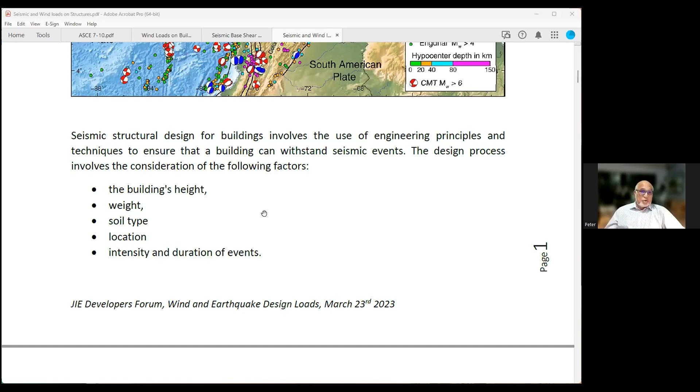The design process involves the consideration of the following factors: the building's height, weight, soil type, its location locally, and in a more sort of larger geographic location basis, the intensity and duration of events.

Well, one of the primary considerations in seismic structural design is the building's foundation. This must be able to withstand the resulting forces generated by seismic events in order to distribute these forces proportionately throughout the structure. Typically, deep foundations such as piles, caissons, and rafts are used for tall buildings, as these can provide greater stability and resistance to lateral and overturning forces.

What this really means is that the soil is your host. You're placing the building in the ground, and from the ground comes the ground motion in an earthquake. If the building substantially disconnects from the soil through shear, it no longer performs in its overturning duties. So the business of deep foundations is, one, to get to harder ground, but two, to contain yourself within the ground so that you do not slide along and emerge at the surface and thereby lose your bearing capacities. So that's a quick aside there.

Another important consideration is the building's lateral load resisting system. This system is designed to resist and survive the horizontal forces and displacements generated by seismic events and prevent the building from collapsing or suffering major damage. Different types of lateral load resisting systems can be used, including moment resisting frames, which we are all pretty well accustomed to: beams, columns, slabs, shear walls, brace frames, and combinations of these. As you will see, we generally have frames and shear walls in a common combination. But let me not pause there, depending on the specific requirements of the purposes and architectural intent.

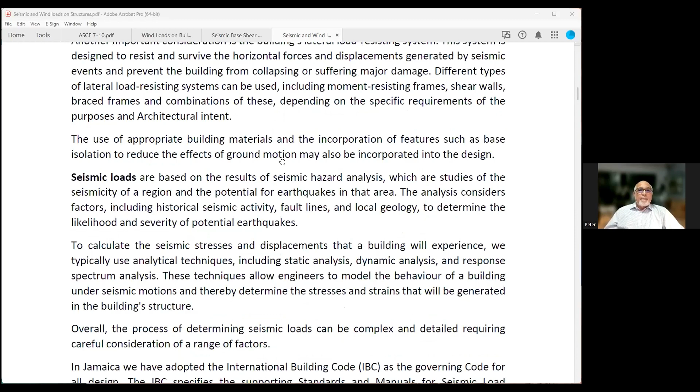Seismic loads are based on the result of seismic hazard analysis, which are studies of the seismicity of a region and the potential for earthquakes in that area. The analysis considers factors including historical seismic activity, fault lines, and local geology, all to determine the likelihood and severity of potential earthquakes.

Moving from that base to calculate the seismic stresses and displacements that a building will experience, we typically use analytical techniques, including static analysis, dynamic analysis, and response spectrum analysis. These techniques allow engineers to model the behavior of a building under seismic motion and thereby determine the stresses and strains that will be generated in the building structure. Overall, the process of determining seismic loads can be complex and detailed, requiring careful consideration of a range of factors.

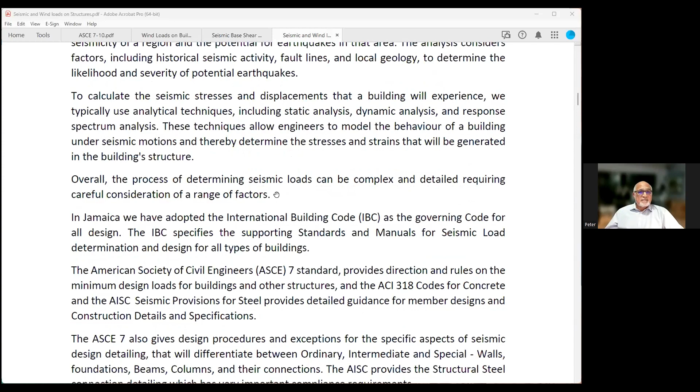The American Society of Civil Engineers, ASCE 7 standard, provides direction and rules on the minimum design loads for buildings and other structures, and the ACI for concrete and the AISC seismic for steel provides the member design and construction detailing and specifications. So it's not all very loosely referred to in the mother document, the IBC, which really presides on every aspect of building design.

The ASCE 7 also gives design procedures and exceptions for the specific aspects of seismic design detailing that will differentiate between ordinary, intermediate, and special framework and walls and everything. These are three tiers of detailing and design requirements to qualify a building for a particular type of lateral load resisting system. As I go on, I will explain better on that.

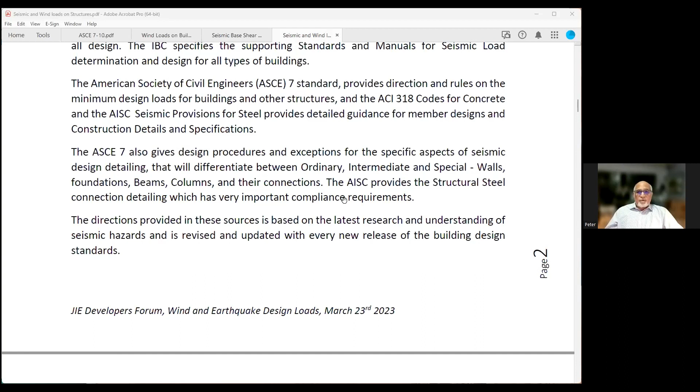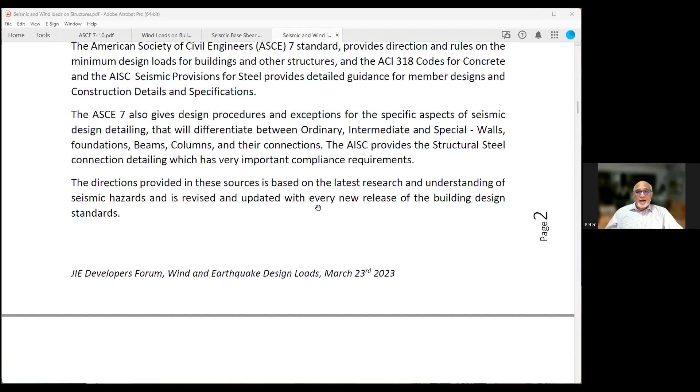The AISC provides structural connection detailing, which has very important compliance requirements. Steel has nearly been an art for seismic detailing, because every time they thought they had it covered, a little shake would go and reveal weaknesses. So in my view, it continues to be an emerging art, steel detailing. I'll come back on that too.

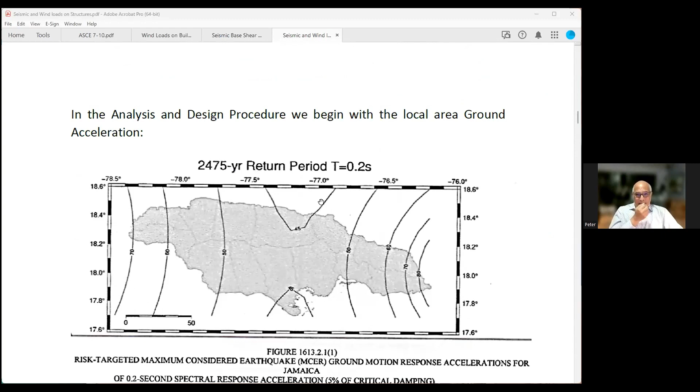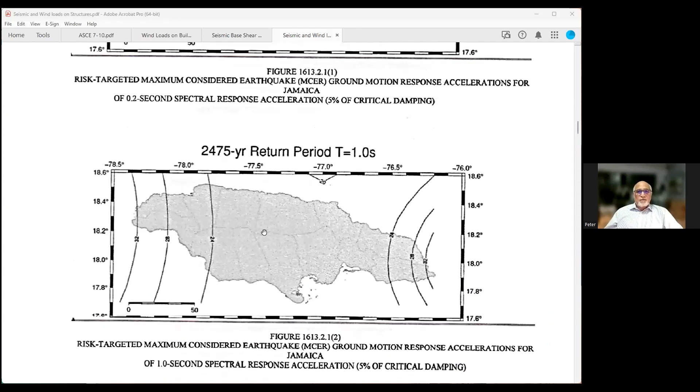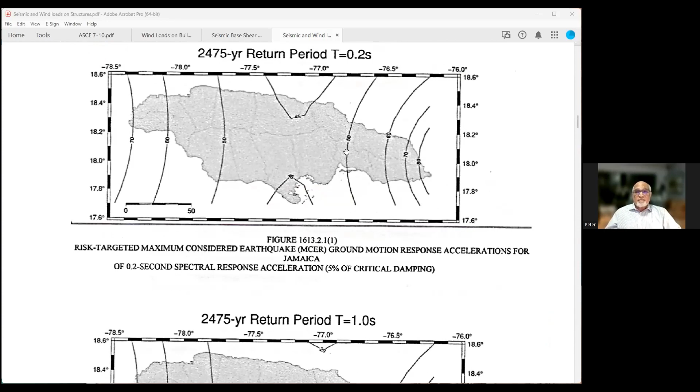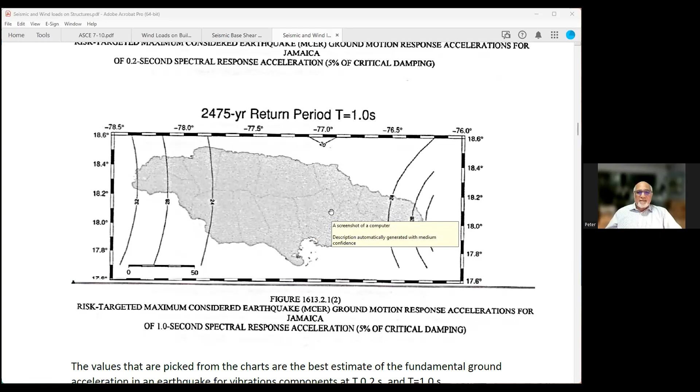Our 0.2 second frequency acceleration as a starting point would be about 0.5, or 50%. Similarly, for the 1 second period, acceleration embodied at that frequency, we are, well, the most of the center of the island is at 0.24. So these are what have been presented to me as the most recent national bases for seismic starting point design.

Okay, the values that are picked from the charts are the best estimate of the fundamental ground acceleration in an earthquake for vibration components of 0.2 and 1. These frequencies have been determined to represent the coordinate values for the full spectrum of frequencies in the average earthquake. So these two values we extract from this chart would help to develop this spectrum. Now this spectrum, let me read what I have prepared.

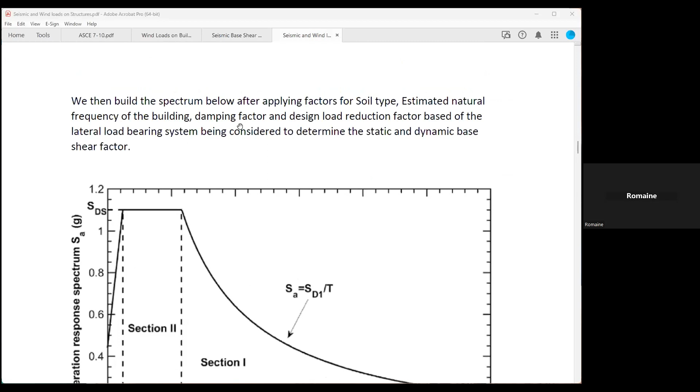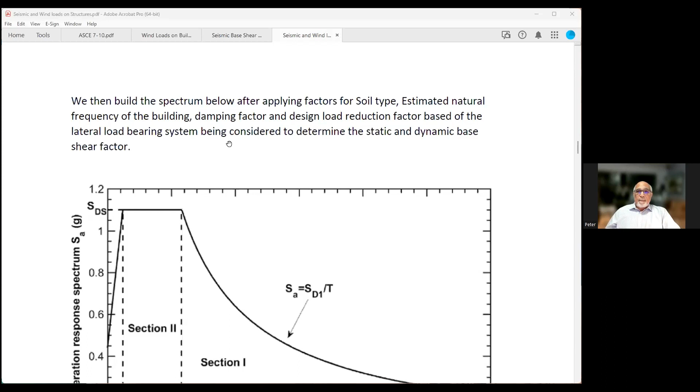We then build the spectrum below after applying factors for soil type, estimated natural frequency of the building, and damping factors, and design load reduction factors based on the lateral load bearing system being considered, to determine the static and dynamic base shear factors. Earthquakes arrive at a building as ground lateral and vertical accelerations, imparted to the building through the ground only.

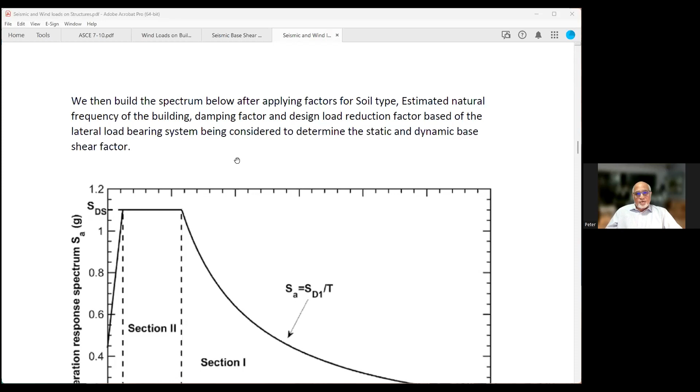So it is our starting point for determining the effective design earthquake loading on a building. The spectrum shows a relationship between the frequencies of ground motion and the forces imparted at these particular frequencies.

Let's quickly look. At point 2, we would have put in what we got from the chart at 0.5, as the acceleration, 0.5g. And we would have put in what we got from the chart here at 1, but a lower value than this - this is a generic chart. Those two points we get from up here, I call them the coordinates of our spectrum, or general building response - the whole spectrum of accelerations at frequencies.

You have to understand that an earthquake doesn't come as a pure clean sine wave. It comes as a whole bunched cluster of sine wave frequencies, carried by frequencies from very high resonance level frequencies to very low, tedious, slow ground motion. There are components of all these frequency movements in an earthquake, and they generally are highest within the 0.2 to 0.6 zone, according to this chart.

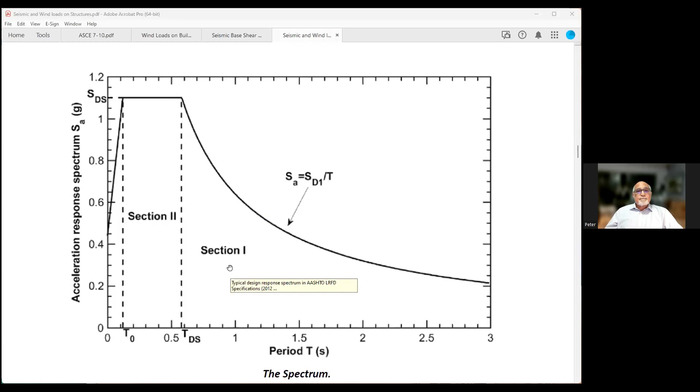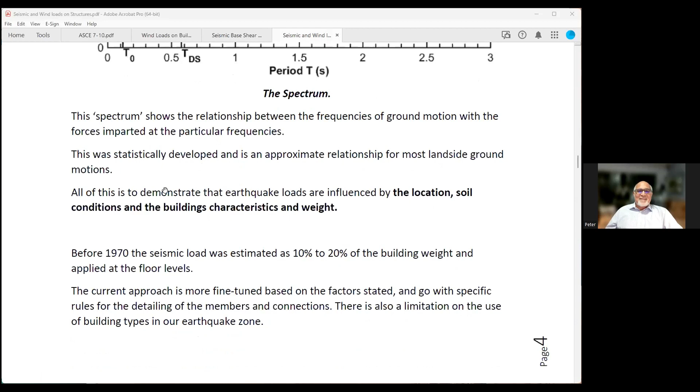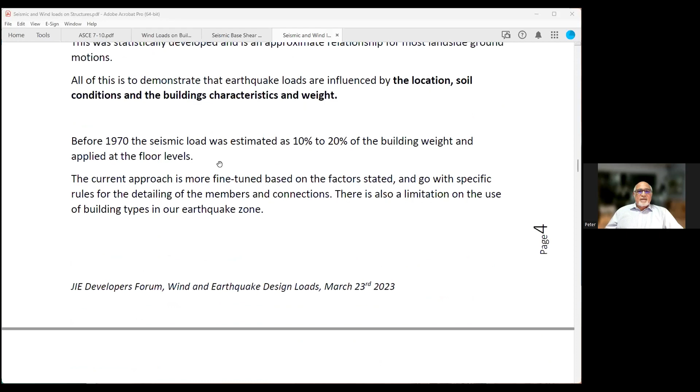This chart is not really populated for any particular job. All of this is to demonstrate that earthquake loads are influenced by the location, soil conditions, and the building characteristics and weights. Let me continue a bit because I think I'm not giving you supporting evidence for what I'm saying.

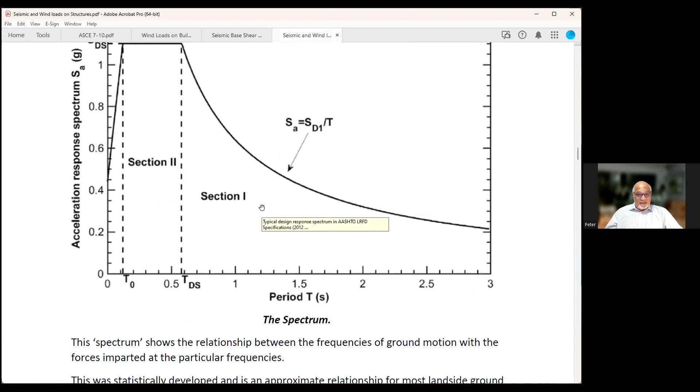There is a context called the soil type, ranging from type A to type F - ranging from very solid rock to soft soil. Type B is the basis for factors of 1 in terms of its influence on this SDS determination.

So for soil type, our common soil in Kingston is type D, and maybe downtown getting closer to E as you have more fines and clays mixed in. Type F, I would put in Black River, anything floating on peat. All of those tend to increase - let's just refer to SDS for the time being - increases your peak acceleration.

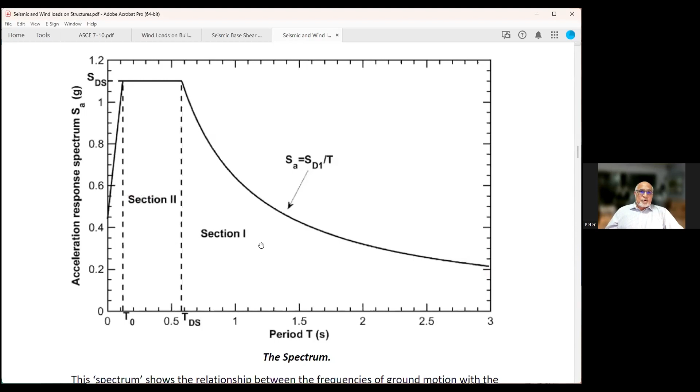D adds about a factor of 1.5 to 1.8 to the starting value. A and B would be 1 to 1, no change. And then F would be up by 2.4. So those are the factors you apply to get ultimately your SDS, which takes you directly after incorporating your building natural frequencies.

Let me just explain that every building has a frequency. Every building, if you pluck a building, it will bounce back, and that is natural frequency in the simplest of terms. When the earthquake frequencies coincide with the natural frequency of the building, that is generally the value that has the highest force participation.

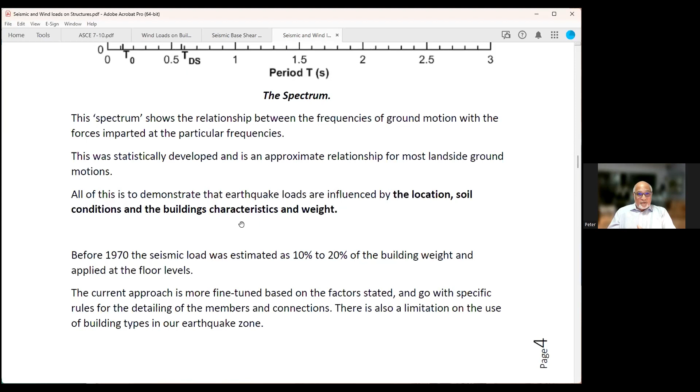I'm running ahead to mode shapes. Mode shapes are the sort of resonant and otherwise response of buildings, so you have mode shape participation - it's not just a single sway that has all the load. You have different types of sway that have components of the imparted earthquake accelerations on the building.

One moment, please. Pause. Sorry about that, just a distraction. So I hope I'll pick up where I should pick up.

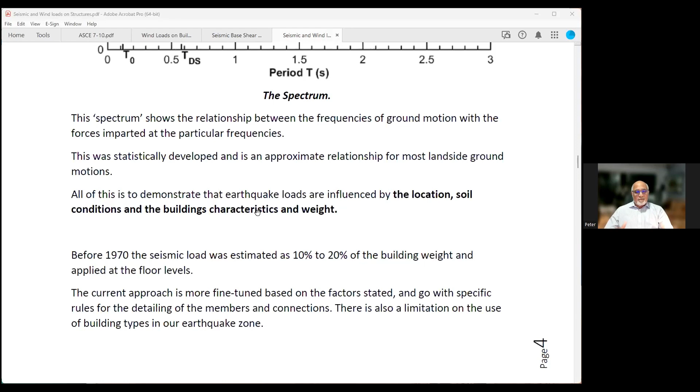I think I've sort of introduced you to spectrums and their delivery of seismic responses. This is really very important when we do dynamic analysis - I will show a little more on that after. So building types totally influence the seismic load you consider in your design.

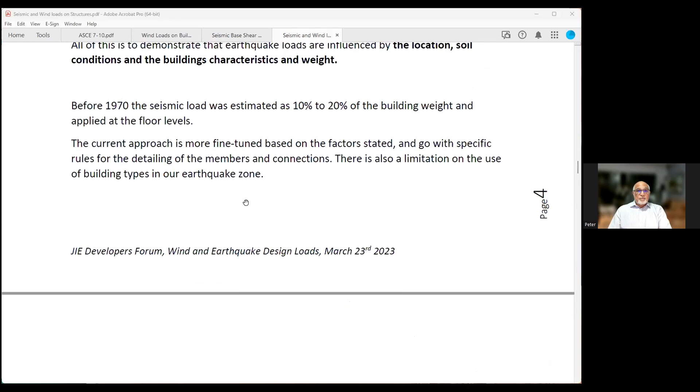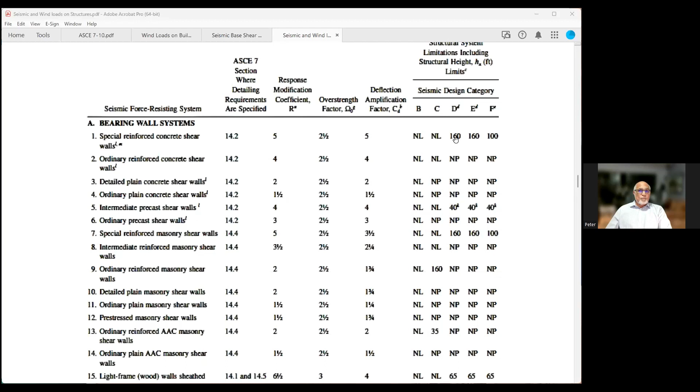Let me just quickly show you some building types for lateral load resistance. A common use is special reinforced concrete shear walls, because if you go to D - all Jamaican buildings are obliged to be in design category D, because we're borderline C in very low instances, but we're pretty well squared in D. So we have to abide by the comments in this column. We're allowed up to 160 feet high for a special reinforced shear wall building.

We're not permitted to have ordinary reinforced concrete shear walls doing the seismic duties. Neither are detailed plain concrete or ordinary plain concrete. With intermediate precast shear walls - which one could consider the old Gore homes as being intermediate precast shear walls - you're allowed to 40 feet. Ordinary precast shear walls are not permitted.

Special reinforced masonry shear walls. Special reinforced masonry really doesn't kick in until we go 8 inches or above for our blockwork, our CMU. And the encasing stiffeners and belts, to use our common descriptions, have to be substantial and detailed according to the highest standard of rebar detailing.

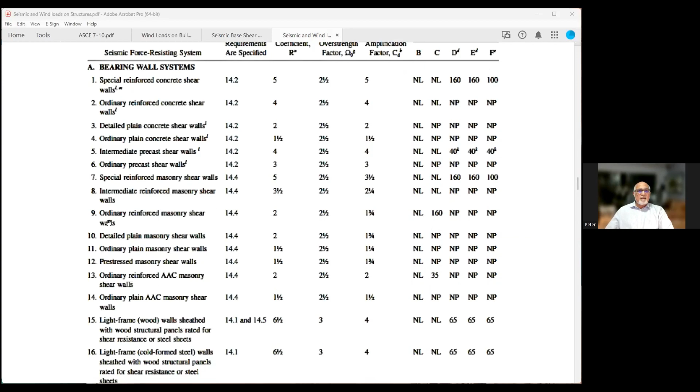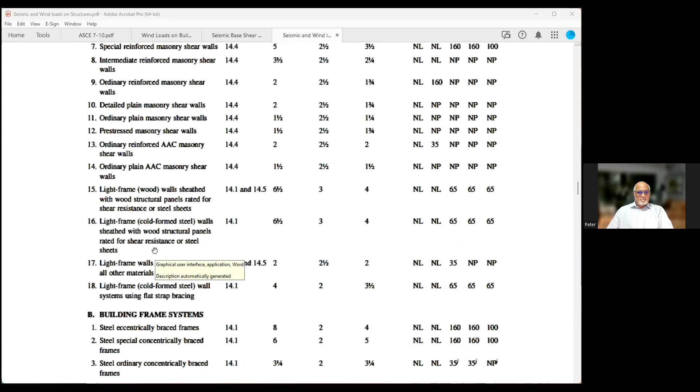Continuing through, what you will see here is that not many plain masonry, ordinary plain masonry, pre-stressed, not many other building types are countenanced or allowed for D, unless you prove that your equivalent building essentially falls into one of the permitted classes. Because invariably you're going to have hybrids, mixes of building types because of just architectural needs. But the ASCE 7 sets down your borders for qualifying for these.

And you're rewarded if you're going to build a building according to the permitted, and you adhere to the special or the ordinary or the intermediate as it requires, you're rewarded with a high value for your response modification coefficient. This high value is good because when you get up to the SDS, you're then allowed to divide it by this response modification on the promise that you are going to detail the building according to these rules.

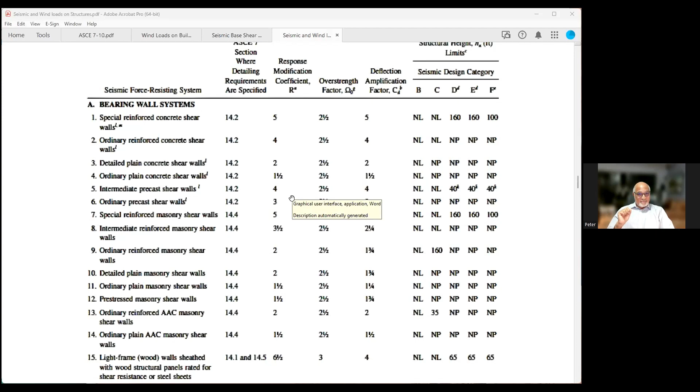If you're not, you're going to have, especially if you look at the non-permitted, very low response modification coefficients. Intermediate, you get a little bit there, but anything that is not permitted requires a higher design base shear. As we go down, you will see where lightweight, light frame structures with special detailing are permitted because they have no mass. So they're very low mass, so they wouldn't be inducing and creating loads.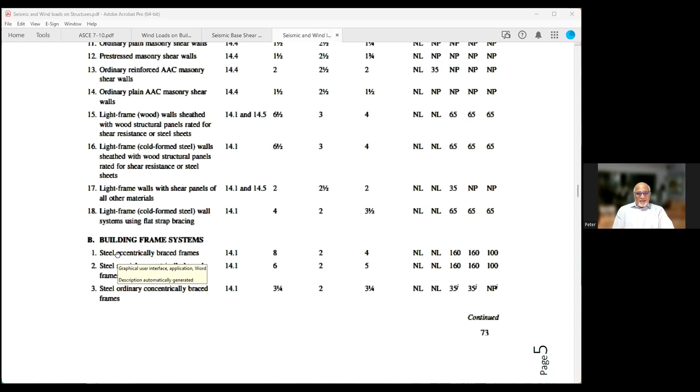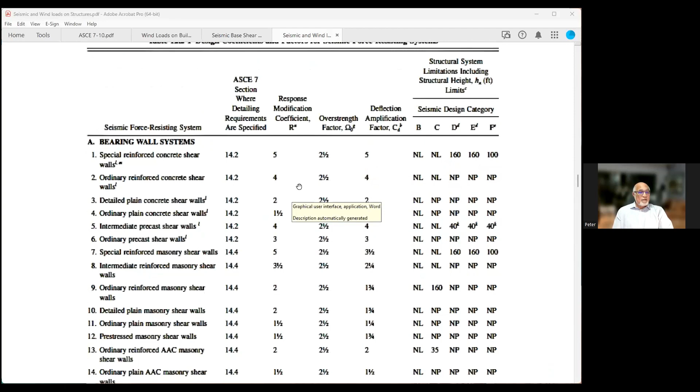Here we go now, building frame systems. A steel eccentrically braced frame is permitted because of their ingrained and natural level of ductility. A lot of all of these conditions and rules stem around detailing for ductility, which is the ability of the building to survive many, many reversals of displacement.

Ordinary to intermediate to special—those are just more intense detailing surrounding creating ductility in your beams, columns, shear walls, and all the connections. The connections are very, very strongly protected by these categories of building type. Let me just jump to where a lot of our high-rise buildings tend to get into the dual systems.

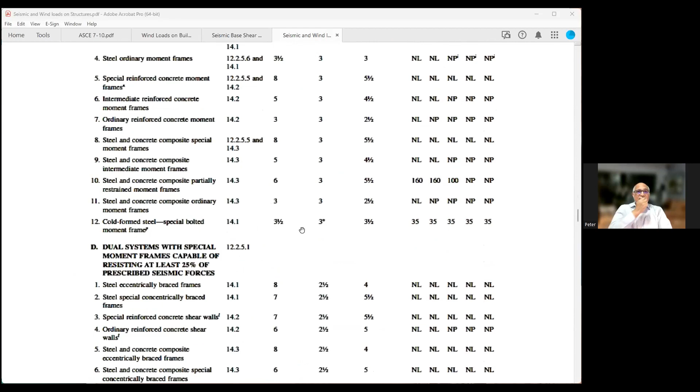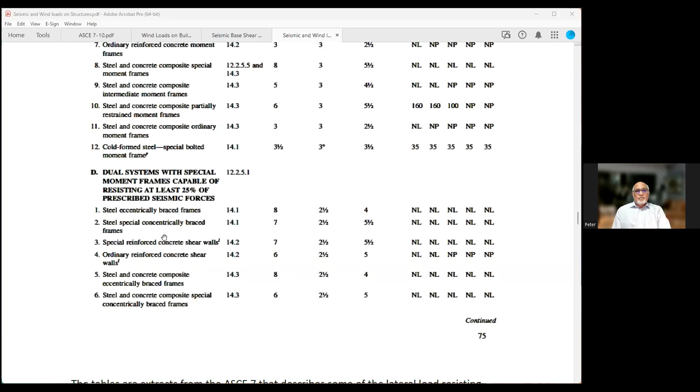In reinforced concrete, special reinforced concrete shear walls, ordinary reinforced concrete shear walls, you get very high reduction coefficients because they expect very high performance from special and intermediate detailing. It's a big difference between ordinary and special, and it's compulsory to enjoy using a lesser design load.

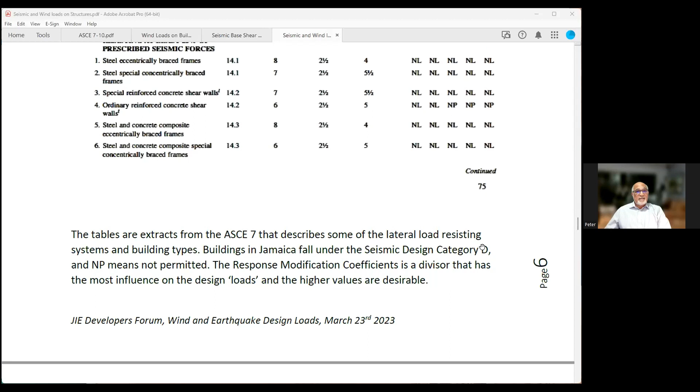So the tables are extracts from the ASCE 7 that describe some of the lateral load resisting systems and building types. Buildings in Jamaica fall under the seismic design category D, and NP means not permitted. The response modification coefficient is a divisor that has the most influence on the design loads, and the higher values are desirable. So in essence, the design loads are not a fixed proportion of the building weight.

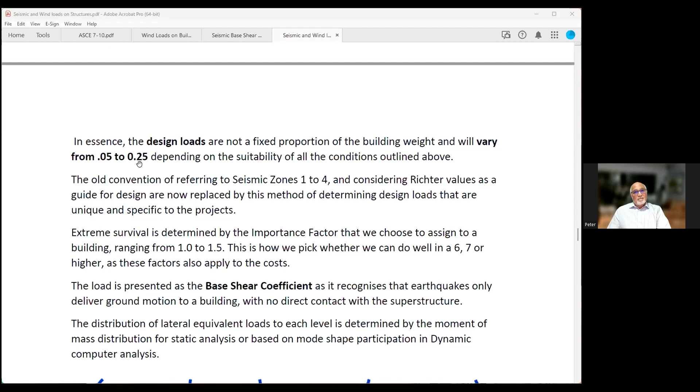Thinking of your base shear coefficient, it will vary from 0.05 to 0.25, depending on the class of building that you are undertaking. Old conventions of referencing to seismic zones 1, 2, 3, 4, and considering Richter values as a guide for design are now replaced by this method of determining design loads that are unique and specific to the projects.

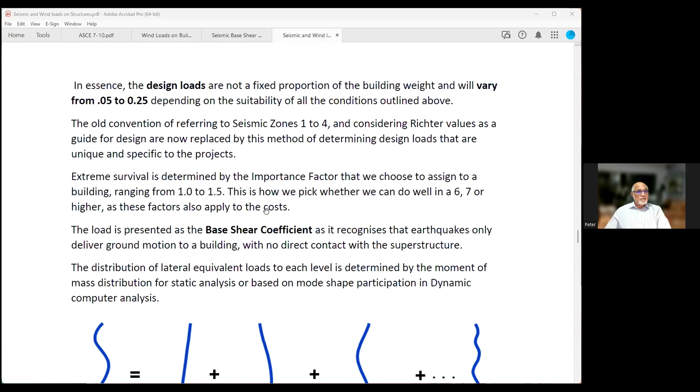Extreme survival. We sort of ask then, how do we treat with a 4 or a 6 or an 8? Extreme survival is determined by the importance factor that we choose to assign to a building. So this ranges from 1, or maybe 0.8 for an agricultural shed, 1.0 to 1.5. This is how we pick whether we can do well in a 6, 7, or higher, as these factors also apply to the costs. So saying that, we choose whether we want to make our apartment more important than it is.

To be sure that it survives, it's the last building standing, and we simply increase our design stresses and everything according to the importance factor. So that's how we treat with Richter values and trying to pinpoint what Richter value you want to survive.

On average, I think we sort of place everything coming out of a 6 with very little damage, 7 with damage, and I really don't know how to discuss above that. But that's all we can do for you. And these are the code-guided approaches and methods and the basis for determination.

All I can say is that if you document your designs to verify and prove that you have abided by the code, your building will do well if built properly, but you will have strong ground to stand on against emotional claims of bad engineering when the building shows some major defects after a 7.

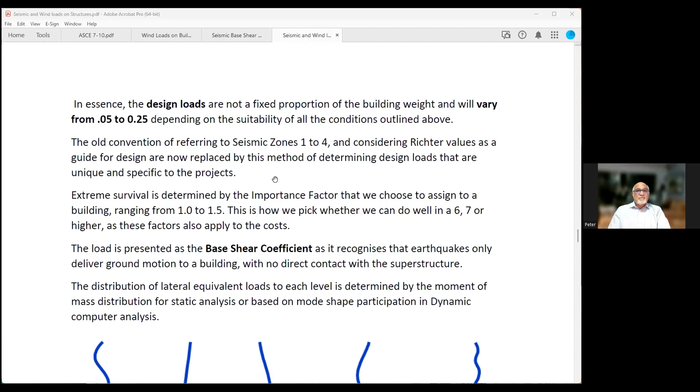This is your safety net, to stick to this implicitly and to not break any of the rules required of the building class, building moment resisting system that you have claimed. Chosen is one thing, claiming is seeing it in the ground as specified.

Okay, so now just to show, the load is presented. Seismic load is presented as the base shear coefficient, which is the outcome of your mode shape and other deductions. You have a base shear coefficient, which multiplied by the weight of the building gives you the gross static equivalent base shear. I say static equivalent because dynamic analysis goes beyond just static loads being applied.

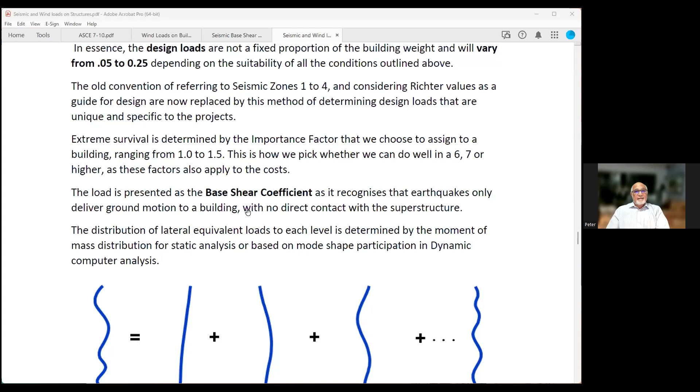Let me explain a little bit about dynamic analysis. The distribution of lateral equivalent loads to each level is determined by the moment of mass distribution for static analysis, or it's based on mode shape participation in dynamic analysis.

Proper dynamic analysis embraces the stiffness deterioration of a building. So it does many cycles of analysis, and with each cycle it reduces the moment of inertia, which is the easiest way to simulate a crack. You reduce the moment of inertia of all the members and do the analysis cycle again, reduce it. It might do four cycles, each with incremental reductions in your moments of inertia to simulate the deterioration of a building during the course of displacements. So that's a good thing about dynamic analysis - it accounts for redistribution of strength in a building as it decays.

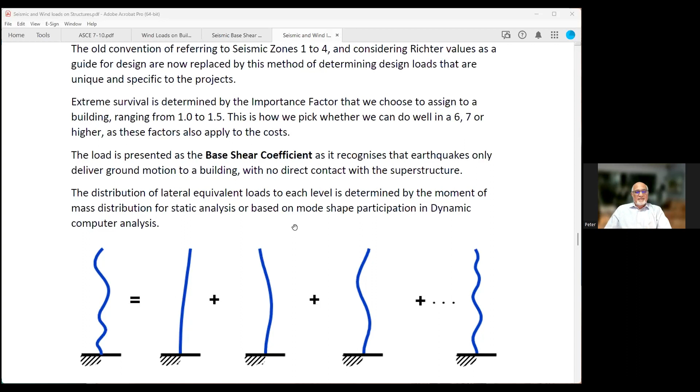Remember, concrete has no tensile value legally, and once it's cracked, there's no gaining back. You put epoxy till it's tired, it's going to crack next door. So there's no claiming back building stiffness once it's all shook up. You have to come through after even moderate or good survival, and perhaps retrofit essential structural points with plating or inserted steel bracing to restore some kind of lateral stiffness integrity - not full integrity, but stiffness integrity.

So the mode shapes - when we get up to 12 or more floors, we can have even a wiggler like that. This is about the maximum mode that is essential in your analysis, because this has maybe up to 20% of the load distribution participation. This has 50%, your most basic sway. This first sort of wobble would be in the 30%, and this is 20 or less. Getting down to here, a single mode shape like that, you won't get that.

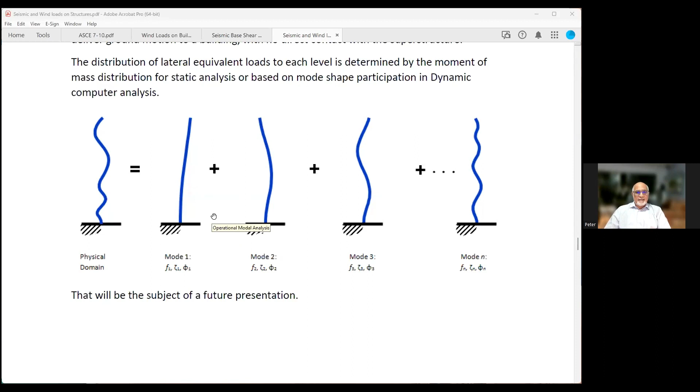And they're summed, root mean square summation, to get the average effective load distribution on your building. So that is a summary of how we get earthquake loads.

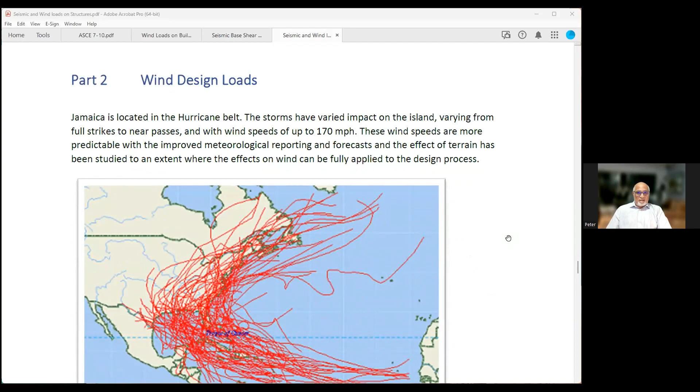Questions later. Okay, wind design - so we move on to wind. Sorry to jump to such a mundane concern. Jamaica is located in a hurricane belt. The storms have varied impact on the island, varying from full strikes to near passes, with wind speeds up to 170 mph. These wind speeds are more predictable with improved meteorological reporting and forecasts, and the effect of terrain has been studied to an extent where the effects on wind can be fully applied in the design process. In the old days, we just used the wind speed by Bernoulli's equation to find an equivalent pressure. But let me go on.

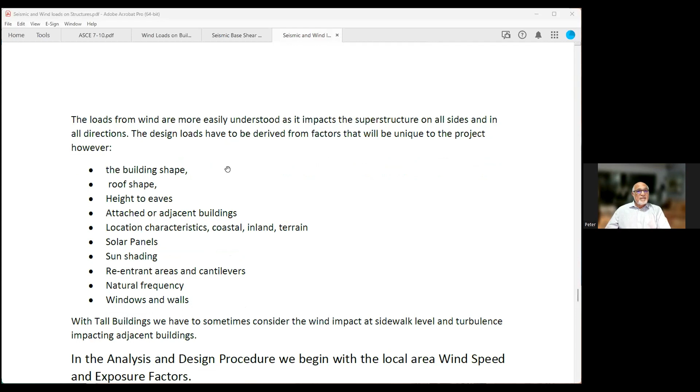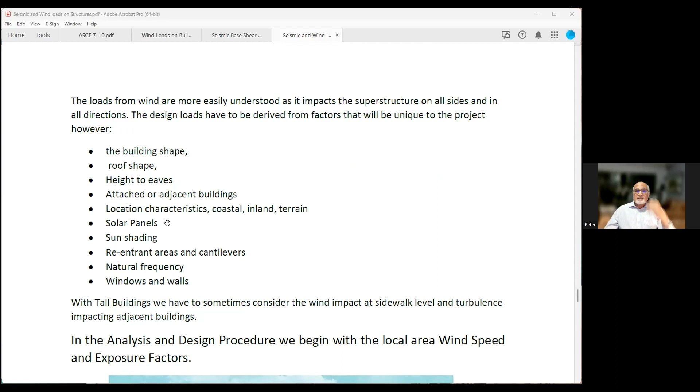The loads from wind are more easily understood as it impacts the superstructure on all sides and in all directions. The design loads have to be derived from factors unique to the project: the building shape, roof shape, height to eave, attached or adjacent buildings, location characteristics - coastal, inland, and the terrain - suburban, urban, bushy. The presence of solar panels, attachments of sun shading and light screens, and all these new trimmings and accessories that we adorn with. Reentrant areas and cantilevers, to some extent the natural frequency of the building, and more importantly, windows and walls.

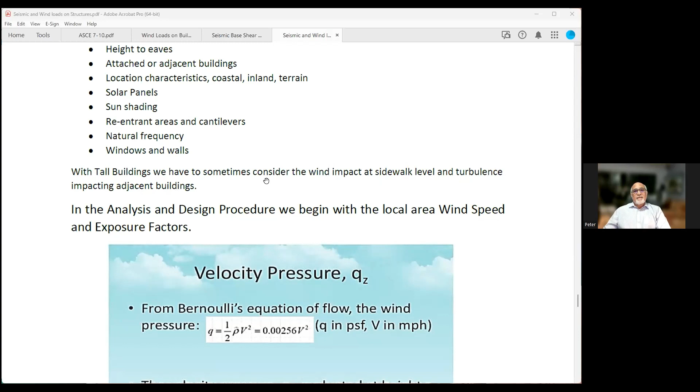Our windows are getting bigger and our walls are getting thinner, so windows and walls are part of the design process. With tall buildings, we have to sometimes consider the wind impact at sidewalk level: tunneling, funneling, concentration of breeze around buildings, and turbulence impacting adjacent buildings. Downwind, anything over 40 miles an hour can generate turbulence 200-300 feet downwind from a building, so anything within that tail can get some buffeting.

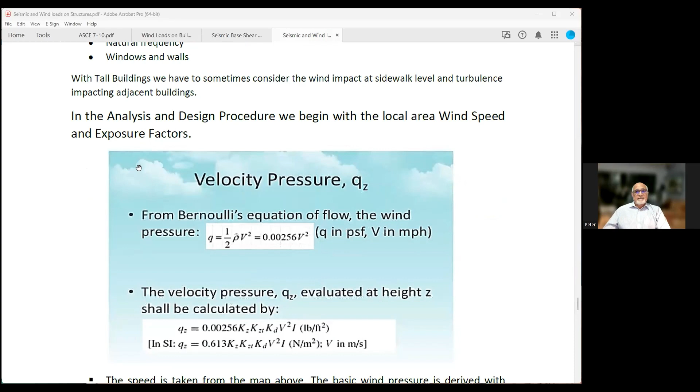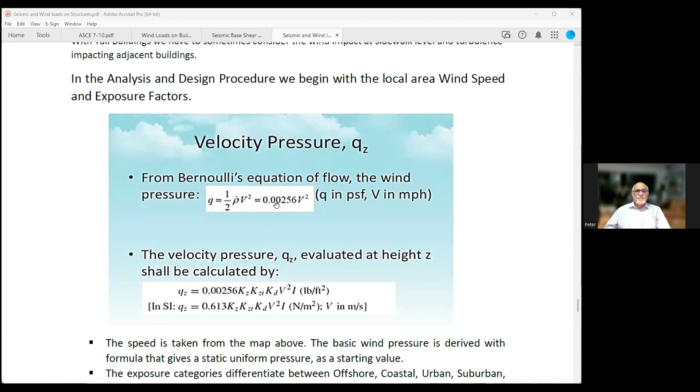In the analysis and design procedure, we begin with the local area wind speed and exposure factors. Q, the basic wind pressure, is derived from its velocity, having to do with the density of air and its velocity - mass times acceleration equals force. So we get Q. This is a pretty standard ratio derived from density and other factors.

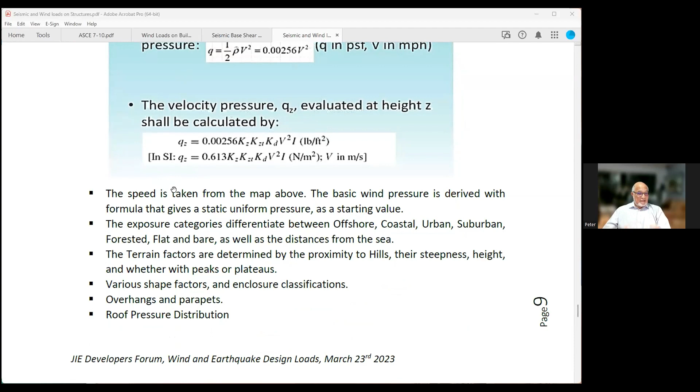The velocity pressure QZ is then derived considering all these little factors, which I'm going to go on to discuss. We can move from a design wind pressure of, let's say, 60, and depending on where on the building it is, it can go down to 10 and up to 180 from that same basic design wind pressure. It varies from place to place and in your directional considerations - it varies widely.

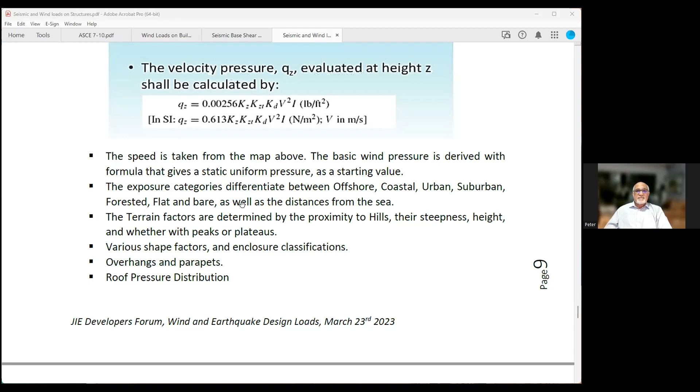The speed is taken from the map above. The basic wind pressure is derived from the formula that gives a static uniform pressure as a starting value. The exposure categories differentiate between offshore, coastal, urban, suburban, forested, flat and bare, as well as distance from the sea. The terrain factors are determined by the proximity to hills, steepness, height, and whether peaks or plateaus. Various shape factors and enclosure classifications also create factors of their own. Overhangs and parapets have their own body of study, and roof pressure distribution is the fascination that people tend to not recognize.

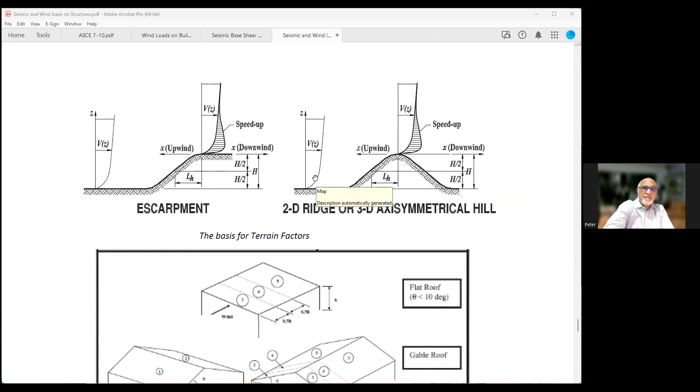Just to show the determination of factors - if your building is here at the foot of this hill, it's going to have some influence. If it's on the slopes, like all of Red Hills and everywhere around Kingston, there are factors to modify your basic design wind pressure. And of course, if you're on a ridge, you're getting the full compression of the whole body of air up into one little spot.

I mentioned roofs. Roofs, depending on the direction of the wind, have drastically amplified forces just because of their shape and wind direction. We've always been tied to a near superstition that the best slope for a roof is 20 or 30 degrees, but that works when the wind is in a predictable direction. When the wind comes upwind longitudinally, all roofs are flat.

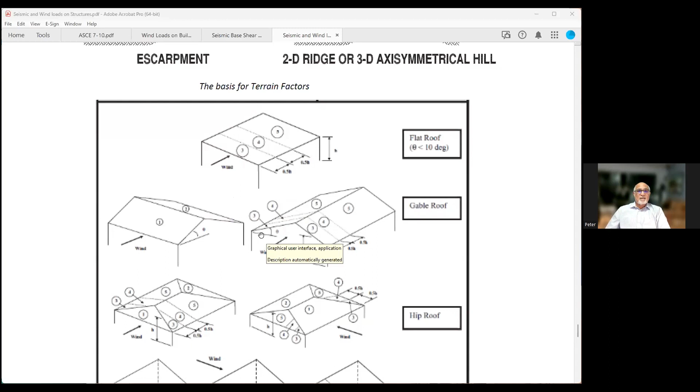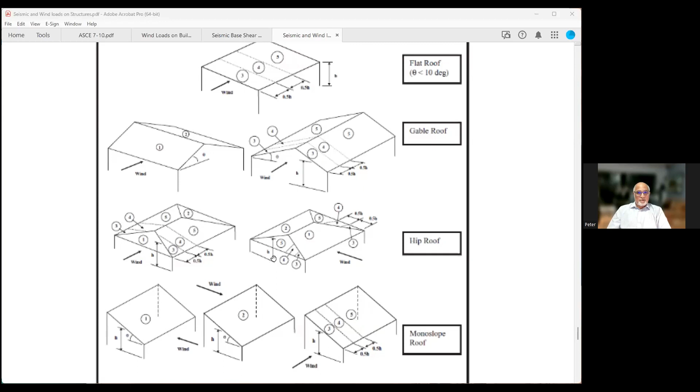So either way, you're still facing high pressures, notwithstanding what pitch your roof is, particularly in the edge zones - 3 and 4 - and along the leading edges, it doubles. In some corners, it triples your wind uplift forces. So these factors are very influential on your design, actual design wind pressures.

The design loads on a structure can vary from as low as 10 psf to 180 psf on a single building based on all the factors outlined above. The highest loads are generally found at the corner of roofs, with the second highest zones being the eaves of roofs. These uplift pressures also act on solar panels, which is a new thing and very much in the news, that are placed on the roofs.

In situations where they are elevated at levels above 1 meter, the uplift acts on both the roof and the panels. So you have to keep your panels within this narrow, turbulent gap, so that both things are not seen like biplane wings, each attracting their own uplift. You really want to mask the perimeter of panels so that you don't double the uplift on your structure.

So that little clearance is pretty important. Roof overhangs and cantilevers are also subject to the highest loads. They actually go up to 4 times, 5 times your basic wind pressure, depending on circumstances. In reentrant areas, where all 3 sides of the roof contain it, you have a static zone there, so it's not so bad. But if you have only 2 sides or 1 side on the back, it gets bad.

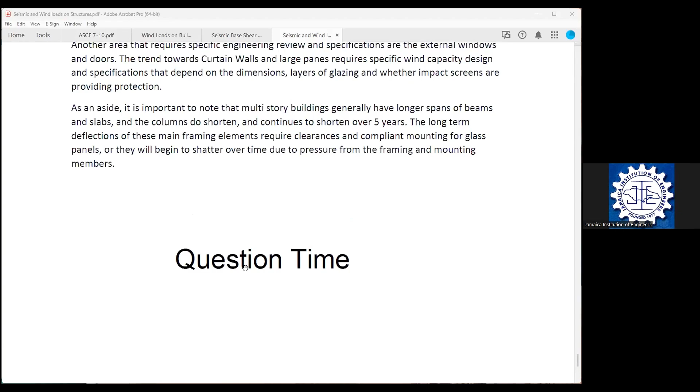Oh, well, all right. Yes, just as a sort of a demo of what would I call it, 3D design analysis. Let me find how to share a screen. Oh, I've lost my thing. New share. Share. New share. Oh, share. Yes. Thank you. Okay, just for a quick demo.

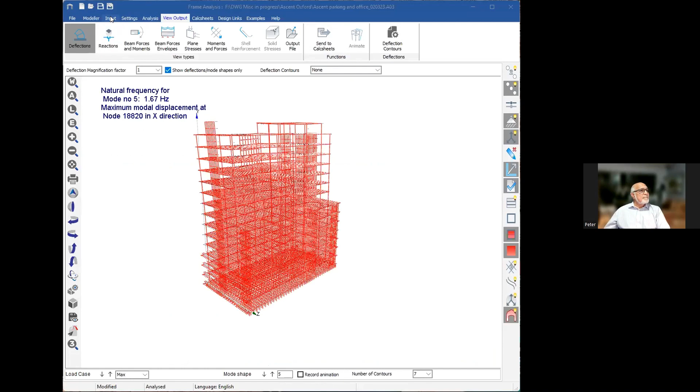This is a building that I had sort of done the analysis for recently. It's still a little evolving, but it's a live one. I don't know what you're seeing, but let me go to the input so you can see what it is. So it's this reinforced concrete, all completely framed building that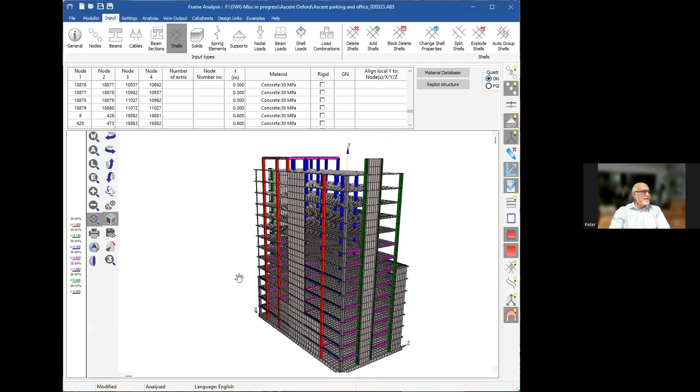has assorted shear walls here and there. And well, this one is a brute. This is a 2 foot thick, 1 foot thick, I can't remember, 8 inches. We capture all walls and throw them into the mix for our shear wall assembly and disposal.

View output, I did a seismic dynamic analysis. So these are just a demonstration of the different mode shapes of displacement, starting with mode shape 1. Let me exaggerate the displacement. Okay. So this is what happens to the building in its first mode of displacement.

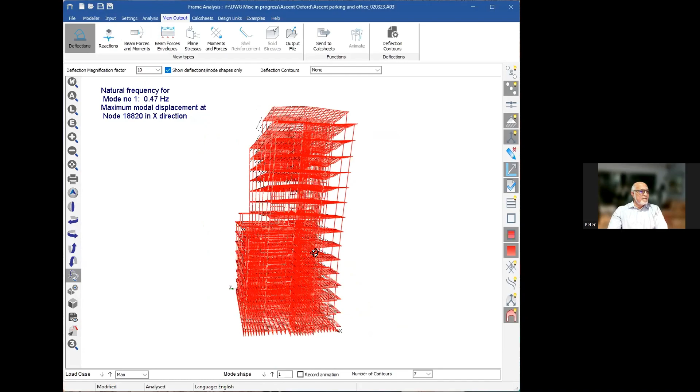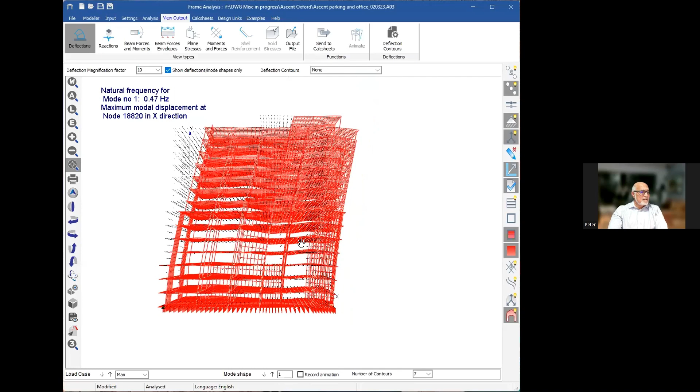What I did do, I took some confinement. This is ground level. It's 3 floors below. And I took soil elasticity to help confine the lower underground part of the structure. It does help to reduce, help to fight uplift and all these other things in the floor raft.

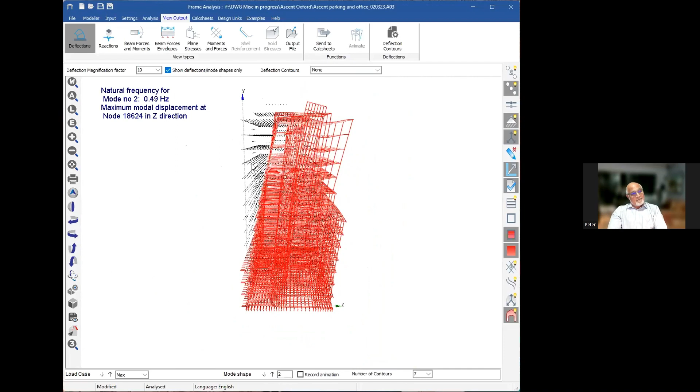The second mode would be more like this, sort of swinging that way. And what you do, you look at this and you see how uneven your sway is, and thicken up shear walls where it's swaying too much, or thin out where it's not swaying enough, if there's such a thing as not swaying enough. The building also does some torsional distortions, and it's all these combinations of vibrations and modes, and the accelerations at the different modes.

Mode 4 was more vertical. Oops, sorry. Very exaggerated vertical bounce. And mode 5 was getting into the fancy dancing. So that's just to show that sort of thing.

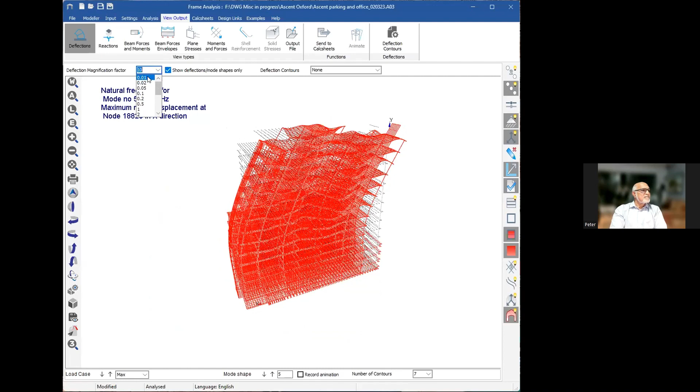And to show the role of shear walls, let us reduce this to a realistic deformation, plane stress, maximum stresses. So you'll see that the stresses in shear walls, they're really working hard. This one shows that it's taking support from the ground. So its peak stresses are where it pops out to the ground in that case.

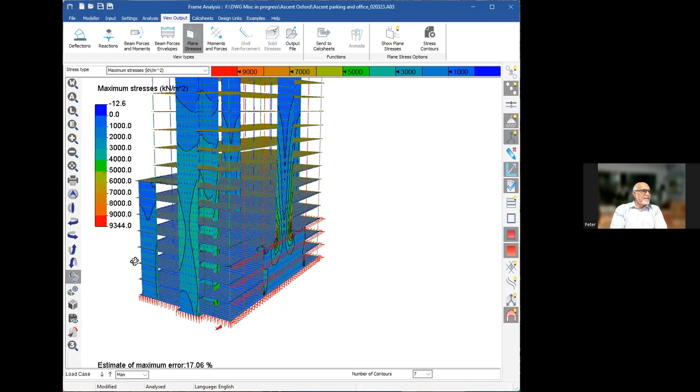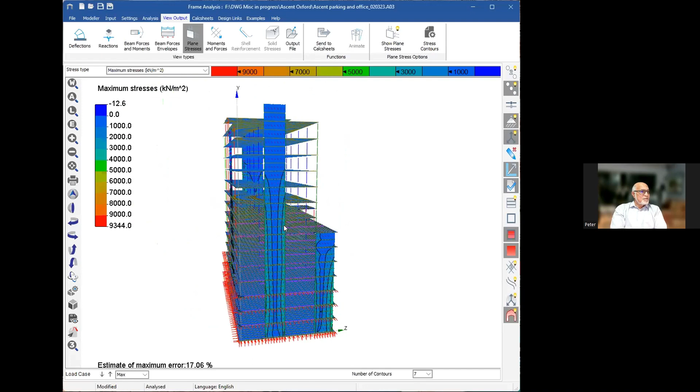This one, being a much thinner wall, wasn't impressed by the ground restraint, but the thicker wall was. So it had a uniform stress until it broke away, and the stress reduces as you go up. You can reduce the thickness of your walls as you go up because they're not working as hard. But you have to watch your maximum rotation and displacements.

Those values are hidden, not in the view output, but in the output file, under maximum nodal point displacements.

Just to say that the maximum sway of this 11-story up, 3-story down building was 165 millimeters. Not as dramatic as the mode shape demonstration - that was just a quick demo. But the thing about dynamic analysis is that it reduces your building stiffness as it goes around and does it again and again to allow for cracks.

Okay, ready for the questions.

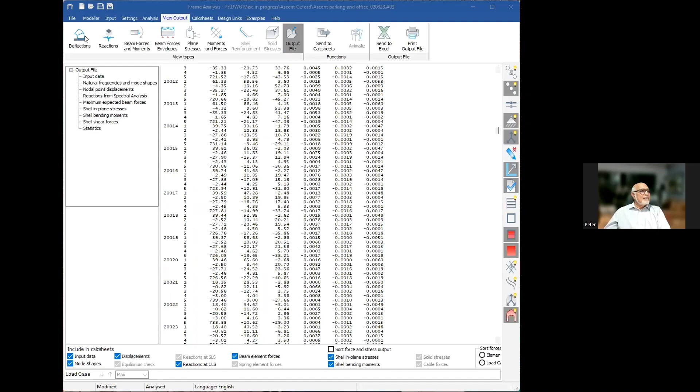Yes, another question for you. At our last JIE Developers Forum, it was mentioned that numerous types of sensors are being deployed and permanently installed in innovative foundation designs in South Florida. What has been your experience with that type of technology locally? I'm sorry, I missed the description of that. What happens in South Florida? They actually employ sensors into the foundation designs to track if there's anything out of balance, out of place, or out of the design criteria. So there's an alarm that would sound in case there's any change.

So do we actually do that in Jamaica? This person is asking. Oh no, we do not do that. That's more a sort of thing that probably started out as a statistical gathering exercise. I'm not seeing the value of that. I can't really grasp the value of it because we can only do preemptive quality control, post discovery. It may have value for the 40-year check, which is what's happening to all tall buildings in Florida. They're going through a 40-year age check because of the north side, south side, Surfside collapse.

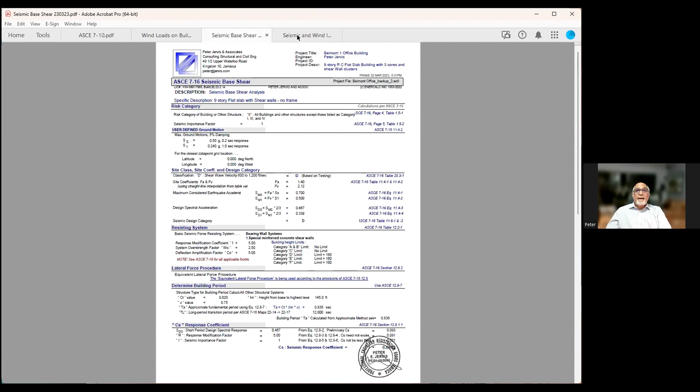I'm just sharing a screen of how easy it is to go through the whole seismic base shear determination. There is software that accounts for inputting your local accelerations, applying factors for the soil, applying all factors, and you come down at the bottom somewhere in there. It's 0.08. It's not difficult. It can be done for every little thing you do. And even if you did it manually, it's not that bad.

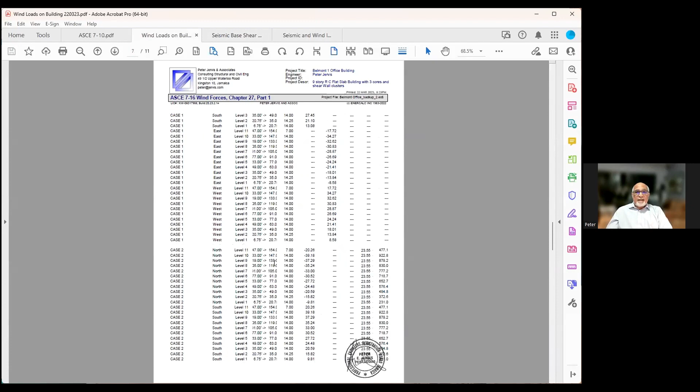Wind load, again, you can load up your building and get all your little wind pressures everywhere. And you apply that to your model and off you go. Or you simply do it manually, do the maths.

Okay, I think we have I see 3 more for you. It's an old Bible here, the old Bible. We're at 22 now, 722. But this is the guidebook that we start with for loads. It even gives you floor loads, covers everything. Rain loads, snow loads, every load.

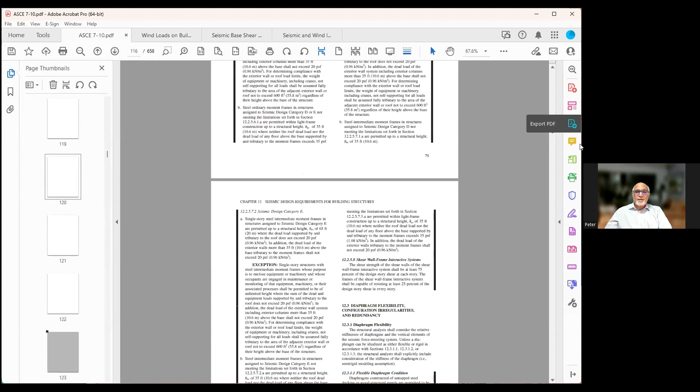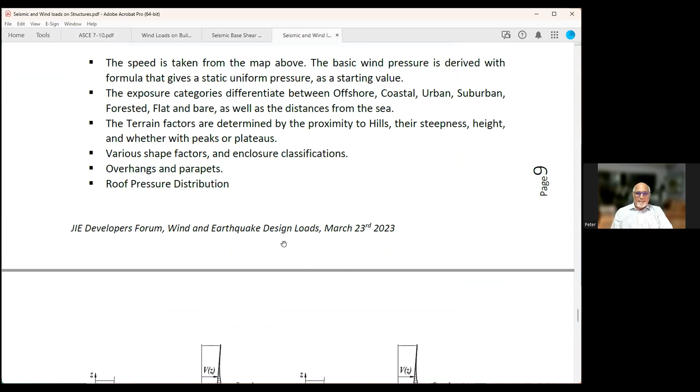Sorry, carry on. Oh, no problem. I'm happy that you shared the codes that should be adhered to. This person is asking, to what extent does the architectural geometry aid in earthquake resistance design? Oh, you need a cooperative architect because we tend to put bulges in the walls. We tend to steal saleable square footage by thickening up our walls. We tend to have columns in the middle of the living room, all of which they don't like. But not every apartment building is a single-story bungalow. And if you're going to go up, you have to give room to our needs.

We should rule and have full authority on shear walls and columns. Our current trend to fit 3 parking bays between columns is forcing our grid spacing out to almost 30 feet. The increase in cost to span anything from 20 to 30 is related to the square of the span. So it more than doubles your cost to take a beam from a 20 to a 30-foot span. A lot of these things developed because it was the optimal way. So our old government and school buildings, everything was at 14 and 18-foot columns everywhere because it was the cheapest. As your spans go up, your costs go up by the square of it.